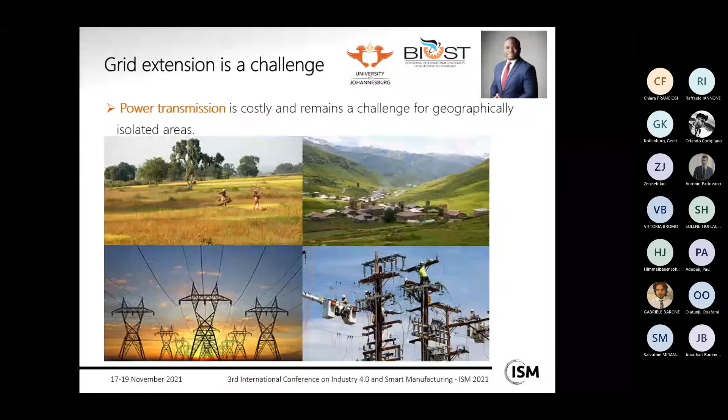Of African people don't have access to electricity. One of the reasons is grid extension. Grid extension power transmission is costly and remains a challenge for geographically isolated areas. Large-scale projects require a lot of time and a lot of financial resources to become fully operational.

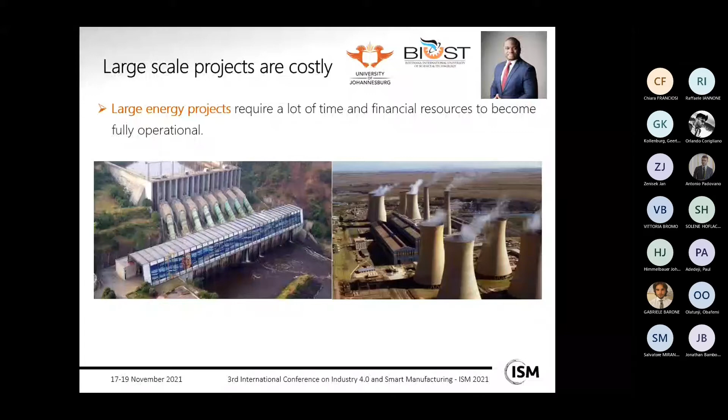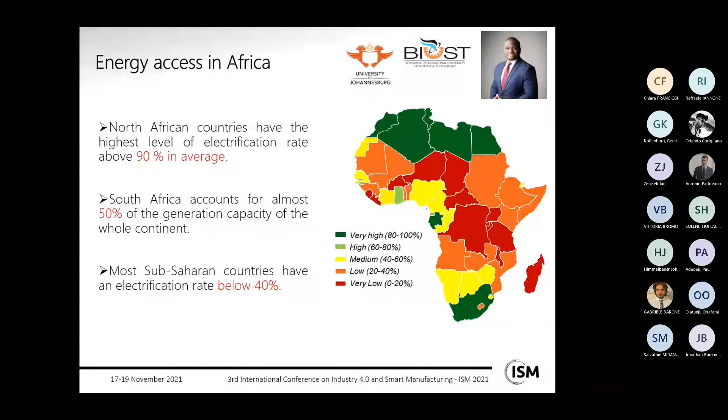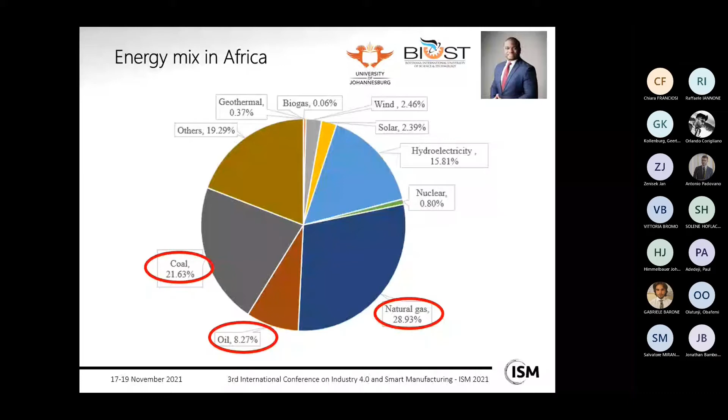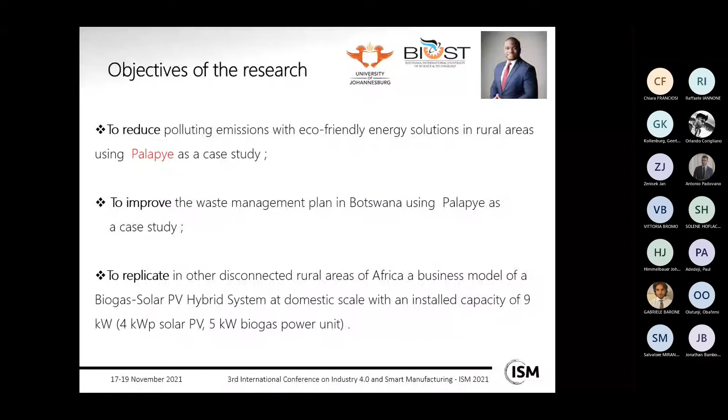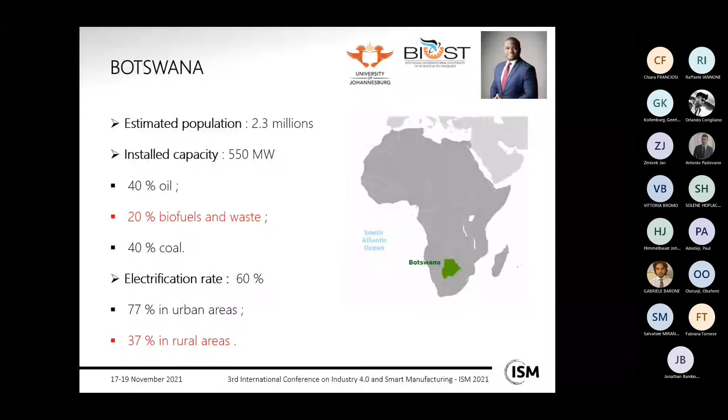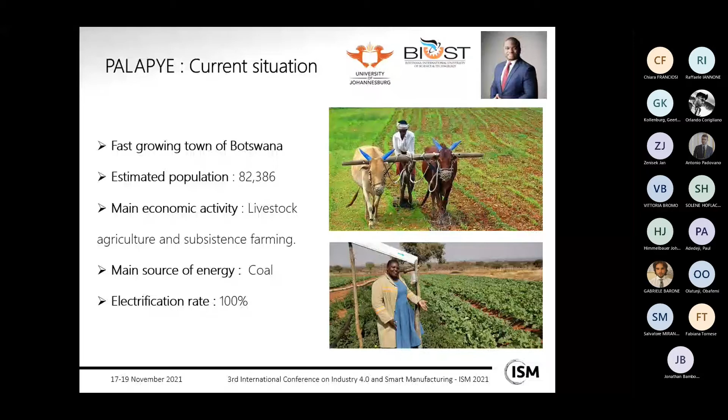However, in Palapye, there are a lot of environmental challenges. The two main ones are the carbon dioxide emissions from neighboring coal mines and power plants, and also a lack of effective waste management.

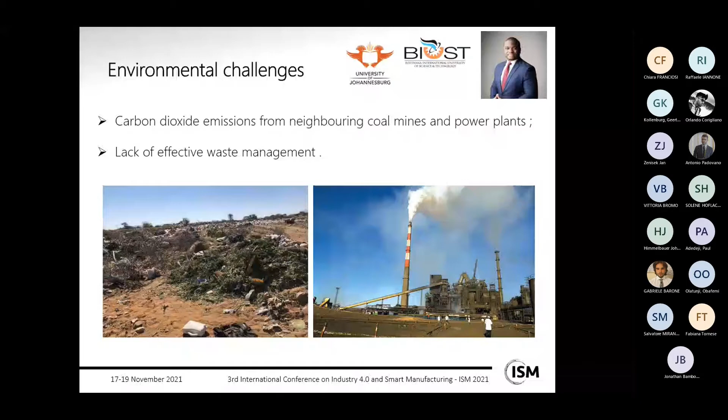So what is the way forward? Is it solar energy? Is it the coal that currently exists as the main source of energy? Is it wind power? Is it biogas? Is it a hybrid solution? What is it?

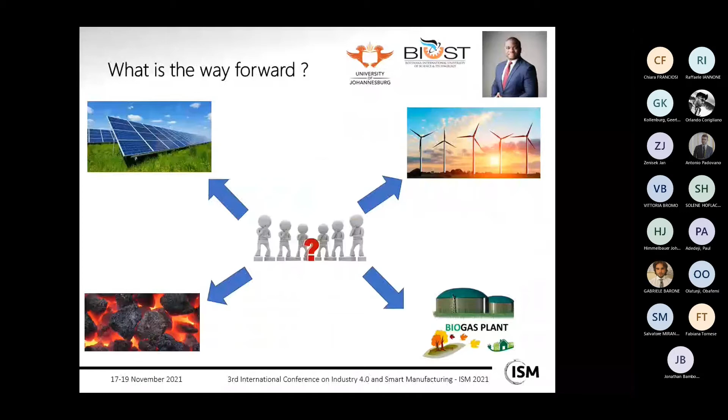The biogas energy potential was also researched. Some studies were conducted and proved that there is an average waste generation to be considered as a potential in Palapye, making it a suitable case study town. Also, Palapye is constituted of a very strong farming community.

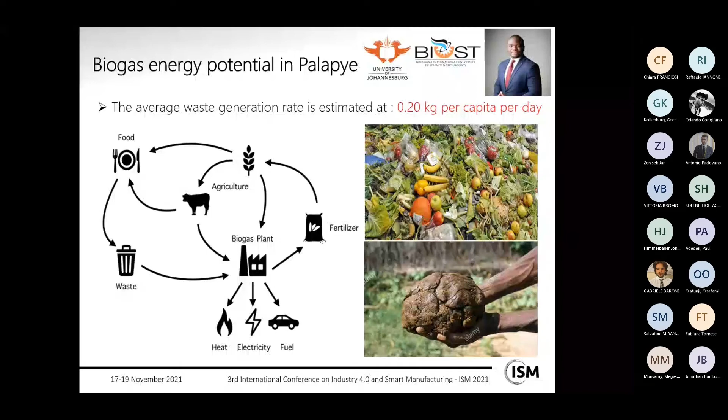There is an availability of cattle manure that can also be used to generate biogas through anaerobic digestion. According to studies conducted, research was done in 3 types of households: low-income, middle-income, and high-income. The study showed that whether in low-income, middle-income, or high-income households, food waste accounted for the main amount of waste generated.

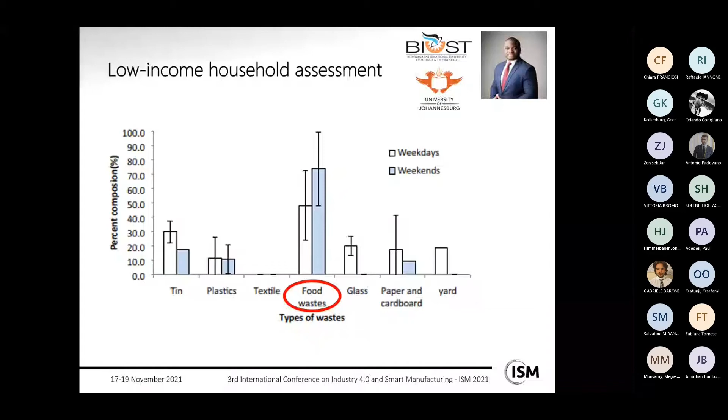Whether on weekdays or weekends, food waste was abundantly generated from these households. On weekends, this source of waste was the highest kind of waste obtained, and in high-income households, it was also the same reality.

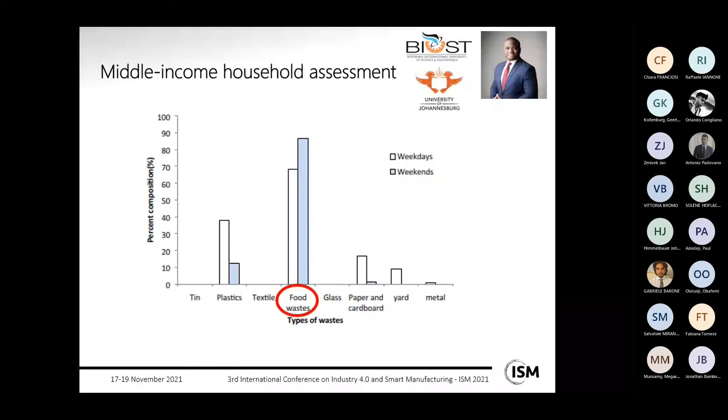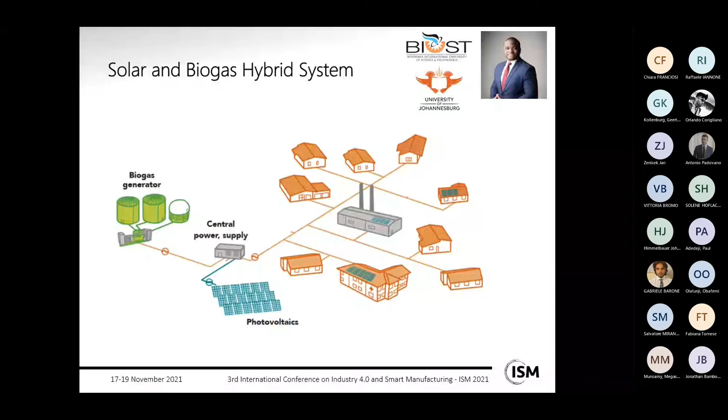So the ability to associate the two technologies allows us to obtain a solar and biogas hybrid system. Regarding methodology, we looked at the typical energy profile of a mono system, in this case a simple mono solar energy system, assuming a village with an energy demand of 2 megawatts at peak demand. As you can see, the solar energy itself, the technology developed, cannot meet the energy demand in the village at all times.

So it can only supply during a specific period. It's much easier because there is enough solar radiation, unless there are climate challenges, but it is much easier to supply during this time, and afterward it becomes a bit challenging.

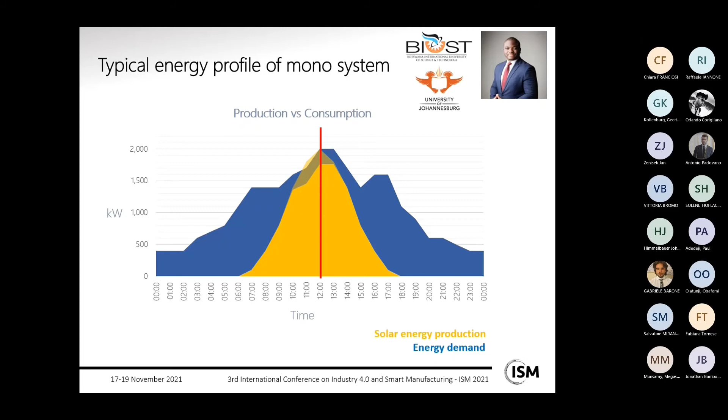This is why, in this research, we sought to hybridize solar energy, which is very adopted on the continent today, with biogas, especially in farming communities. Why? Because it manages the intermittency of the solar energy source, it improves the waste management system in the locality, it reduces polluting emissions in rural areas, and it is a replicable, affordable energy solution.

So we are looking at this research to replicate it but at domestic scale, because biogas has usually been used at industrial or much larger scales. So how will it work?

It will be constituted of 2 units. The first unit involves waste collection: animal manure, food waste generated by households, animal manure from different farms with cattle, and abattoir waste, because in that region they have a lot of abattoir facilities.

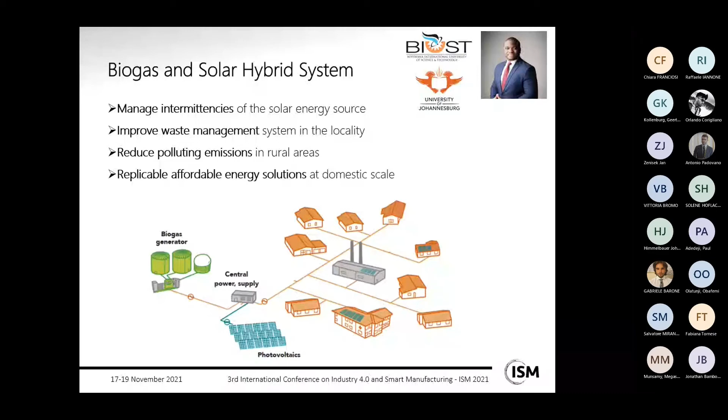Then there is solar energy generation, and a backup system. This is a pilot study, so we want to see the backup action, basically taking the food that people normally throw away and putting it in a digester, whereby bacteria digest it and gas is generated, which can be used for electricity generation, as well as for cooking or eating.

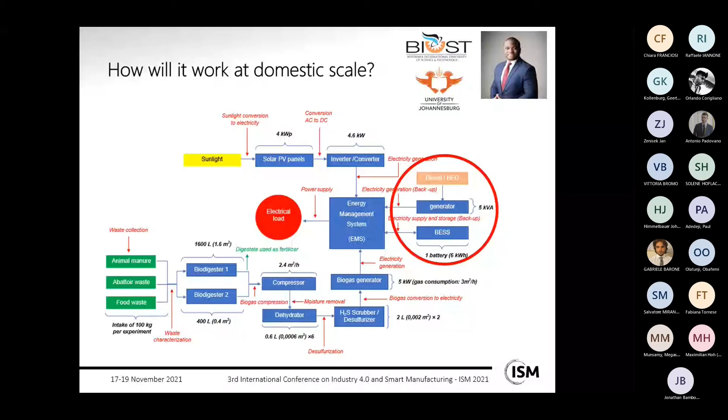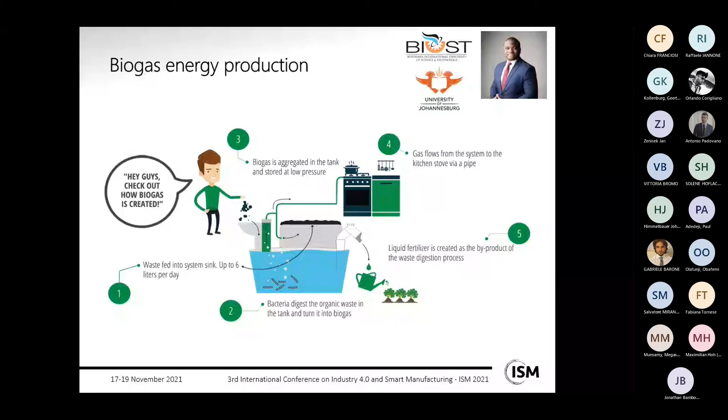Solar energy production basically generates power from the sun, but using different equipment such as inverters to convert DC energy into AC. And this is, at a glance, the hybrid power system that we are thinking of proposing to communities such as the one of Palapye.

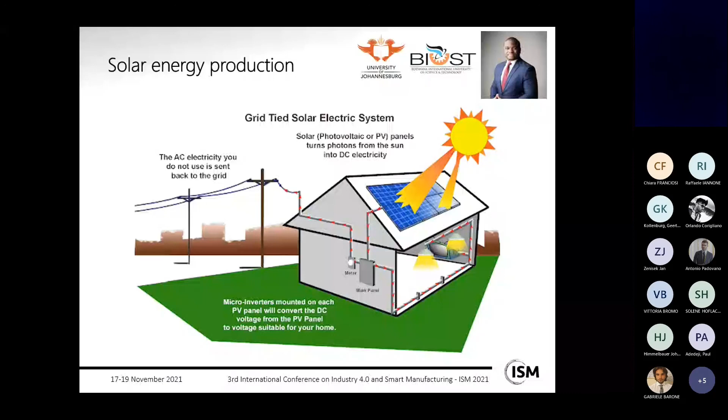As I said, instead of just a solar power unit, we add a backup system and an energy management system that can help manage the power supply at the comfort of their home. This is the power supply projection we are looking at: 12 hours with solar energy, 6 hours of biogas per unit, and the backup section will depend on the need and availability of the system.

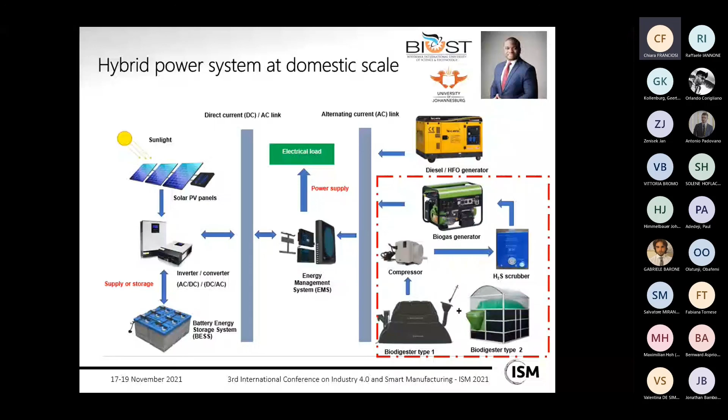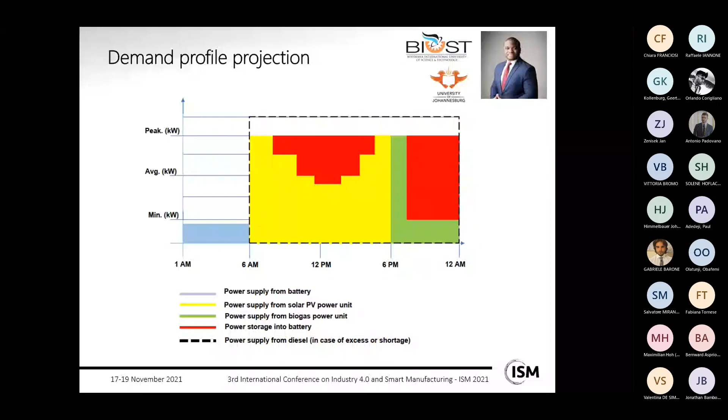The conclusion, as I said previously, is to manage intermittencies, improve waste management, reduce polluting emissions, and get affordable energy solutions. Our research shows that 40% of waste generated in Palapye is food waste. 100 kilograms of food and animal manure abattoir waste could be used to generate enough biogas to complement a solar system. So our recommendation is that hybridization of solar with other waste-to-energy technologies should be considered. We wish to thank the University of Johannesburg, the Botswana International University of Science and Technology, and the National Research Foundation. Thank you very much.